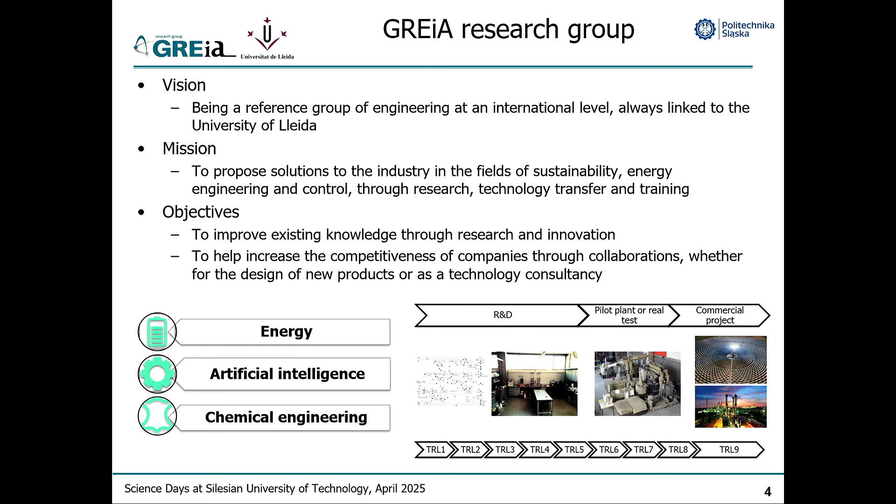I like very much this image at the bottom because, as most of you here are engineers like us, you will understand this. I really like having new ideas and going to the lab and testing them and seeing if my crazy ideas work. So we like to work here in the lab, but being engineers, we also love to go to the industry and to really know that what we are doing gets into the industry and into the market. The photos here are not by chance.

We actually worked many years in concentrating solar technology in Spain when it was developed around 15 years ago. And today we can say that all the thermal energy storage tanks that are built worldwide have a little bit of our input, of our science in them.

So what do we do today at GREIA Research Group? GREIA stands for Energy and Artificial Intelligence. In Spanish, AI is Inteligencia Artificial, so we say it the other way around. But actually, that's the idea.

It's a joint of two research groups previously, one working on energy, where thermal energy storage is our flagship. But today, 60% of our academics are from artificial intelligence. And I always say that they do their weird things, they do their theories, but half of them work very closely with us to use artificial intelligence in what we do every day, from control strategies to design of storage tanks to selection of materials.

And they keep telling me all the time, Luisa, we have to meet, we can do much more for you. And we also work in chemical engineering. When you work in thermal storage, you will see later, if you don't do materials, it's a little bit difficult to be there.

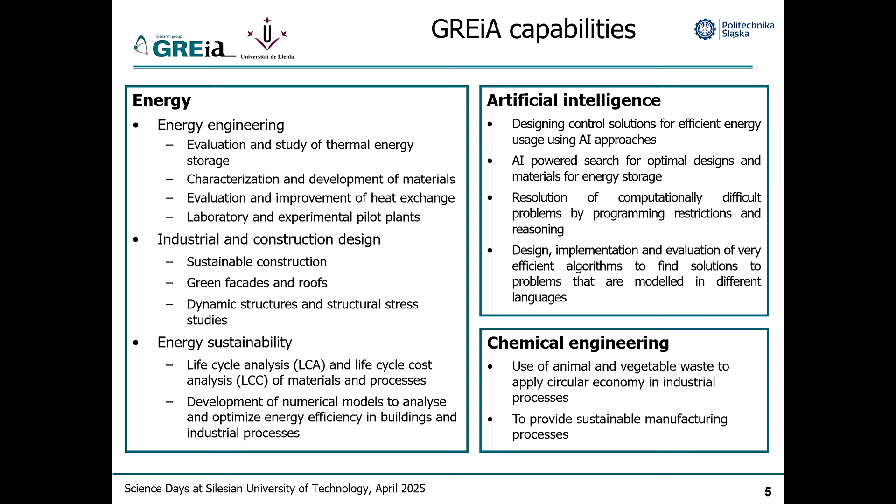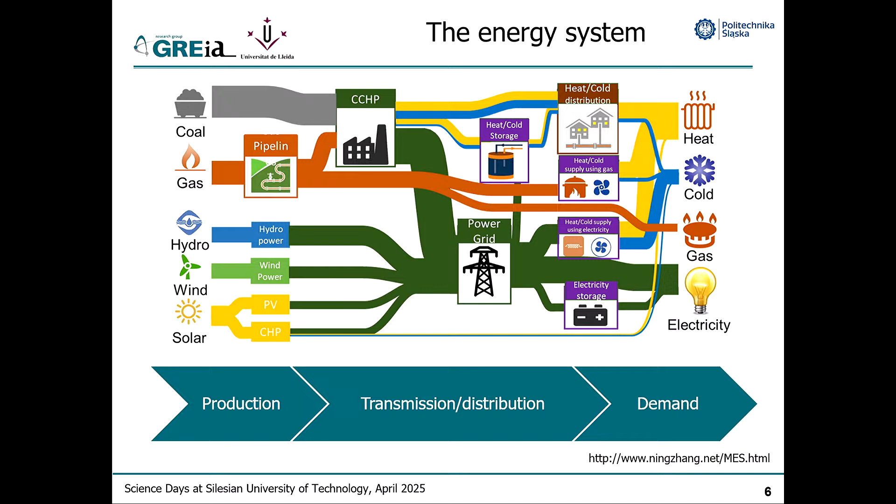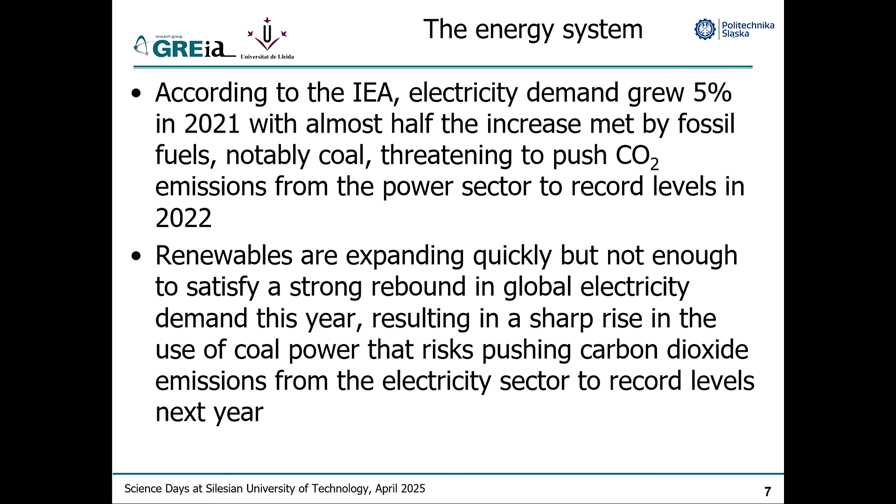And actually, thermal energy storage has or can have an impact mostly on the production and the demand side. But when you do this, the way you use this technology is very different. We don't have to go too deep into this. We all know energy today is really one of our main concerns. Energy demand is growing, even though we are making big efforts to decrease our per capita energy use. More and more people, more and more buildings, more and more industry, and therefore this is a big concern.

Also in Europe, we are short in energy and we have to import a lot of it, some parts of Europe more than others, but I think all of us have a little bit of renewable energy potential. One of the goals of the EU is to decarbonize our energy system, and that's where we have a role and can make an impact. As you know, renewable energy is not constant. We have it when we have it, and we have to use it when we need it. And this is why energy storage is so important.

For us, thermal energy storage is also very important, but I always say that it's the forgotten or unknown energy storage technology. When we talk about energy storage, everybody immediately thinks about batteries. Today, other technologies like supercapacitors and flywheels are there, but most people don't know or don't remember that thermal energy storage can also have a key role in this change.

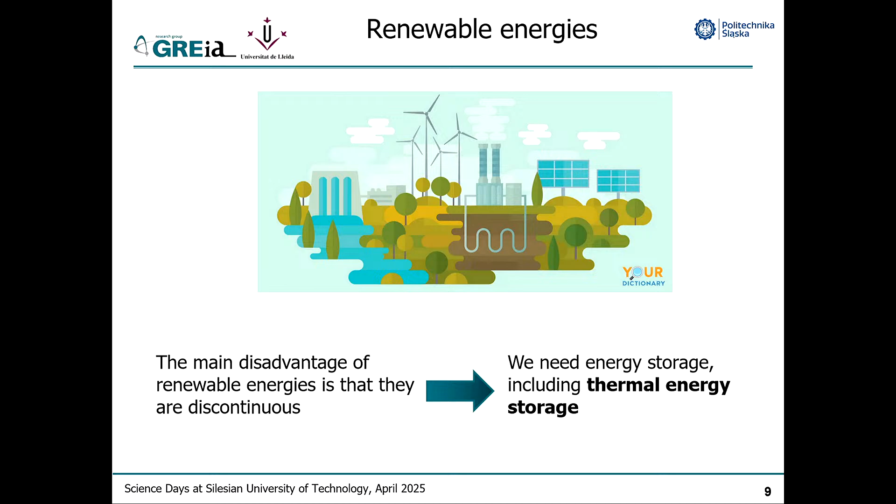We can use it just for storing the energy and using it at a later stage. That is what it's usually known for, to change, let's say, the time of use of the energy. But we need to remember that we can also change the power, we can also change the place, so we can transport energy, and we can also change the temperature, a lot of times linked with a heat pump, but sometimes you don't even need the heat pump. So really thermal energy storage is a technology with a lot of potential that can help us, as I said, both on the supply side and on the demand side.

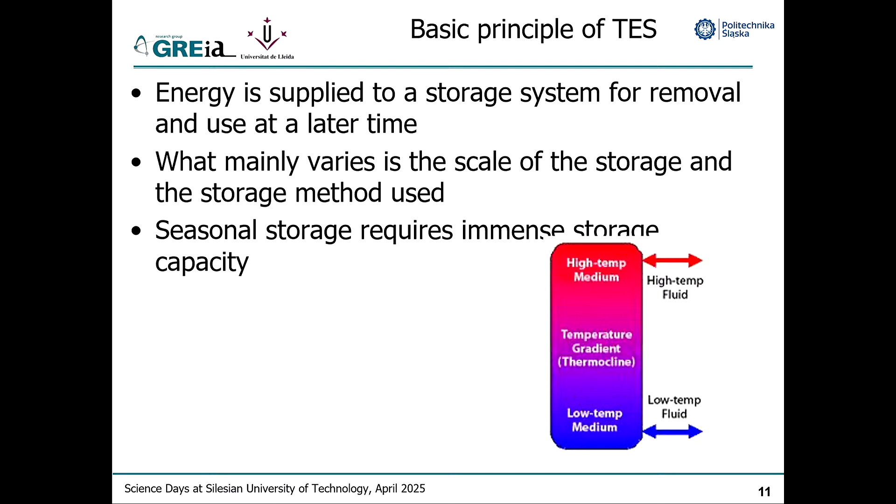This is also kind of obvious, but a lot of people forget about it. We need a thermal energy storage tank. We need a place to store this energy, and this is one of the issues we are always working with. The size of this tank will depend not only on the technology, but also on how or why you need this technology. If you need it for the short term, it will be smaller. If you use a technology like thermochemical, as we will see, it will be smaller. But if you go to seasonal storage, which is something we are very interested in, it will be bigger.

Also, from an engineering point of view, it is very important to understand that for these systems, you need to charge and to discharge this storage tank. We need to remember that storing the energy, the material, will give you the energy density, but the way you charge and discharge will give you the power. So how fast can you charge or discharge this tank?

And I always hear people telling me, you need to have a lot of power because you need to charge and discharge. That's not always true. For example, in the built environment, as we will see later, if we use the storage in the walls to keep the room at a nicer thermal comfort, then you don't want to discharge fast. On the contrary, you want to discharge very slow.

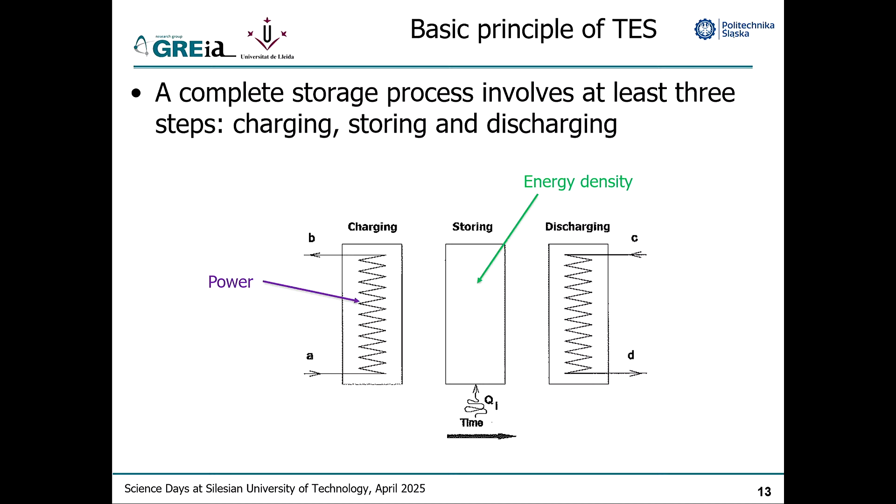Okay, so this is something that we always need to keep in mind, that there are these two aspects, and also that, as you see, this is very multidisciplinary. When we work on energy density, we work at material level. When we work on the power, it doesn't matter if it's fast or slow, it's more a mechanical engineering level, but if you put it in the built environment, then you talk with civil engineers or with architects. So at the end, as I said, many different disciplines are involved in this technology.

Even today, in countries like Poland, this is becoming very important because we are realizing that cooling is starting to be one of the future keystones of our world. Until now, people were very focused on heating, but today we also all use cooling very much. But the problem with cooling is that it's very energy demanding, and also usually we use it at a given time of the day. For example, in summer, you would need air conditioning mostly at lunchtime.

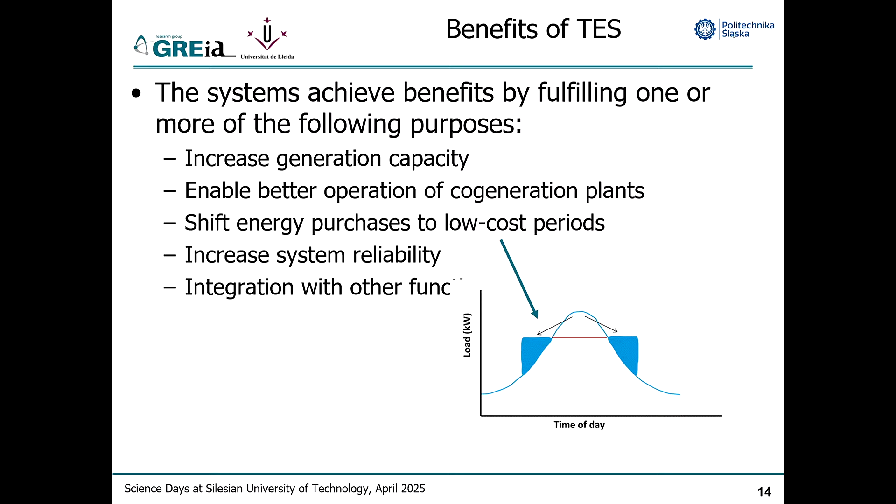If all of us switch on our air conditioning systems, then we have these peaks in the energy demand that sometimes our energy grid cannot withstand. So that's why we are using, for example, thermal energy storage, where you can produce this cooling at off-peak times, and then you use it during the day. How do we do this? The easy technology is just you produce ice during the night when you have excess electricity, and then during the day, you only have to melt this ice to have the cooling.

I think that for us, this is known, but to me, what is very strange is that there is a lot of industry using this technology. For example, the dairy industry, but if you ask them, do you use thermal energy storage? They will tell you no. Do you store energy? No. But they are doing it because they are producing ice at night and then using this cooling during the day. That's why I started saying that this is an unknown technology or forgotten technology.

So which technologies do we have here? I think that the slide is heavy and it doesn't come.

Yeah. So there are three main technologies in thermal energy storage. The first one is the most known one, which is sensible energy. This is when we heat a material to store energy in it. Okay, so the technology here, remember, is just heating up, for example, heating up water to use it at a later stage. The second one, which has been attracting a lot of interest in the last 20 years, is latent thermal storage, when we use the phase change of a material to store energy. The example I gave before, ice, this is latent thermal energy storage. Okay?

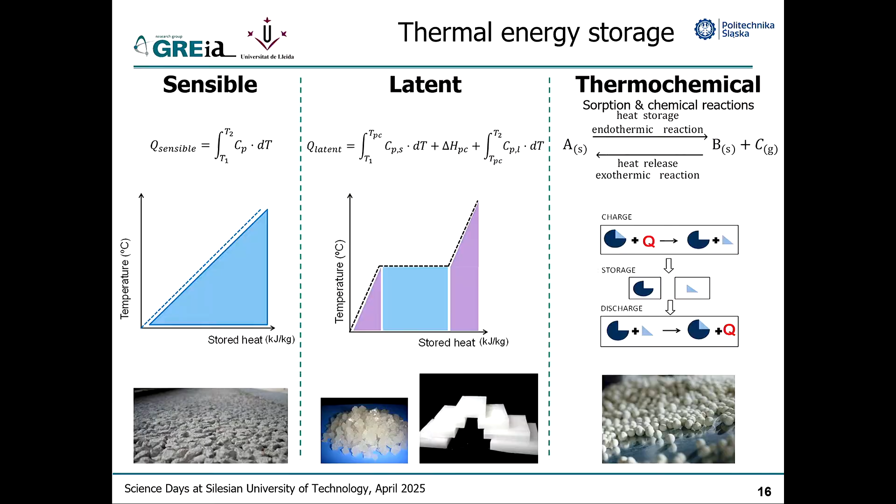Why do we use this technology? Because we all know that to melt something, you need much more energy than just to heat it up, so you have more energy density. Okay? So with a smaller amount of material, you will have more energy density. These materials that are used like this are called phase change materials, PCM, so some of you might have heard of them. So then you will ask me, okay, if we have ice, that's it, we already have it.

The only problem is that here you get the energy at the temperature of the melting or the solidification of the material. With ice, this constant temperature is 0 degrees C, and you cannot change it. So to change it, you need to change the material, okay? And you need to have other ones. For the built environment, we work at 20 degrees C, 30 degrees C for thermal comfort. We work at 60 degrees C for hot water.

For industry, we are going much higher, and actually, as I was discussing this morning, I have a project with one of your colleagues sitting here with us where we are trying to use metal alloys as phase change materials for the industry, and we're working at around 300 degrees C.

And the last technology is thermochemical, and here it's where we use either sorption or chemical reactions to store energy. So really here we are either by physical means, with sorption, or with chemical means, with chemistry, breaking up a molecule to store the energy, and then when we put these two molecules together, we retrieve this energy and we can use it for our application.

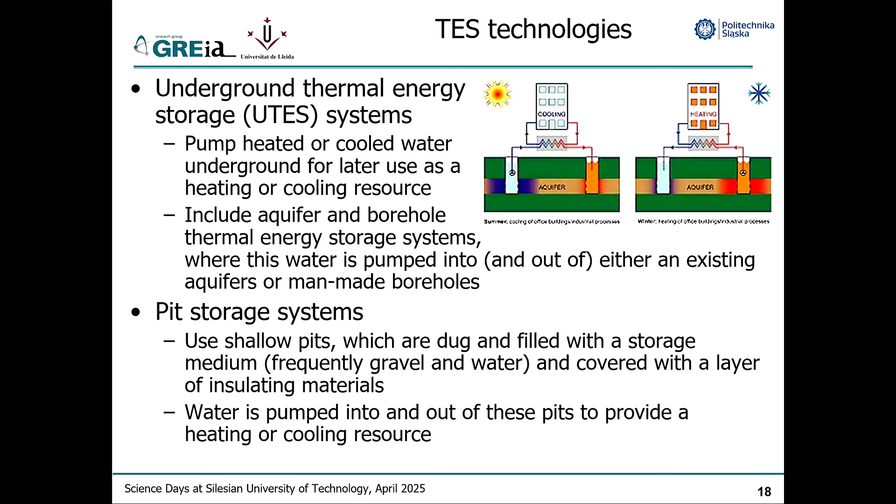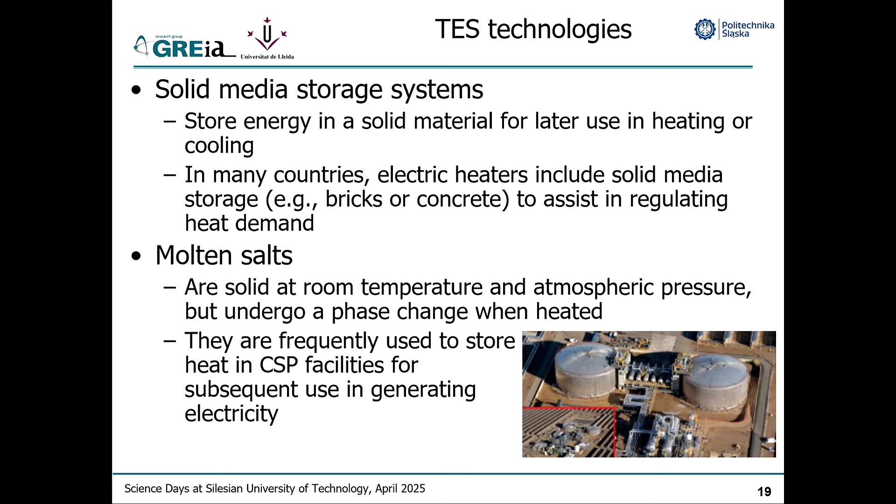To me, it's very interesting to know that this started to be developed in the USA in the 80s. And then it was finally developed together with them, but mostly driven by European funding in the 2000s, and today it's a commercial technology.

Water tanks, of course, are coming back today because of the change of the energy systems at home. In Spain, we use them today to store solar energy in thermal systems. In the UK, for example, they use them because they mostly use electricity to heat their water tanks, and also because of the peak demand, they use water tanks to get showers.

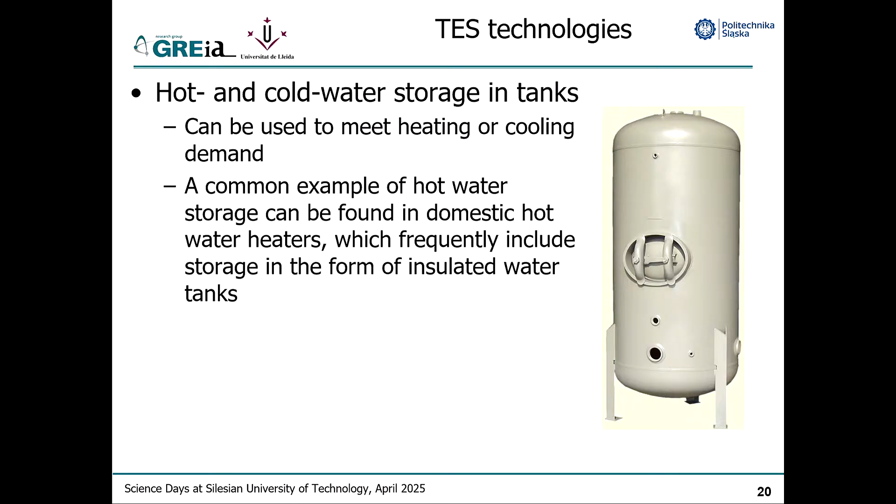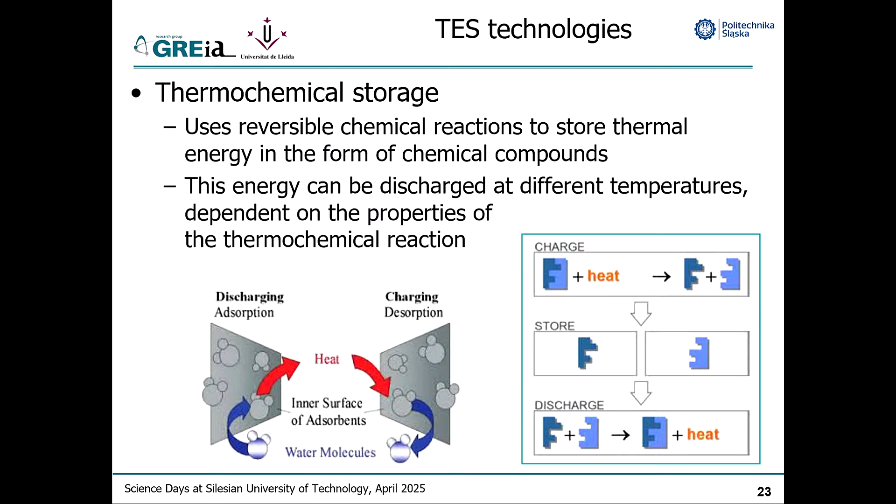For latent, as we discussed before, it's not only about energy density, it's also that you recover the energy at a given constant temperature. Ice storage, we already discussed this a bit. And then with thermochemical, again, remember that these are two different technologies. I always say I don't like the name thermochemical. I prefer to talk about sorption and chemical reactions.

And then applications. I already mentioned most of them, and that's why I will go fast through this. Today, the main applications of thermal storage are the building ones, where you can put energy storage in different ways in your building envelope and just let it go with the climate. This is when you talk about passive systems. You can then intervene with, for example, fans to discharge these storage systems, and then it becomes active.

Or you can even join them with your already active systems, for example, with domestic hot water, but today one of the hot topics of research is with heat pumps, of course. At high temperature, solar cooling was a very hot topic around 20 years ago. Today, it's not so attractive because to do solar cooling with thermal storage, you compete with photovoltaics. Photovoltaics with heat pumps is cheaper.

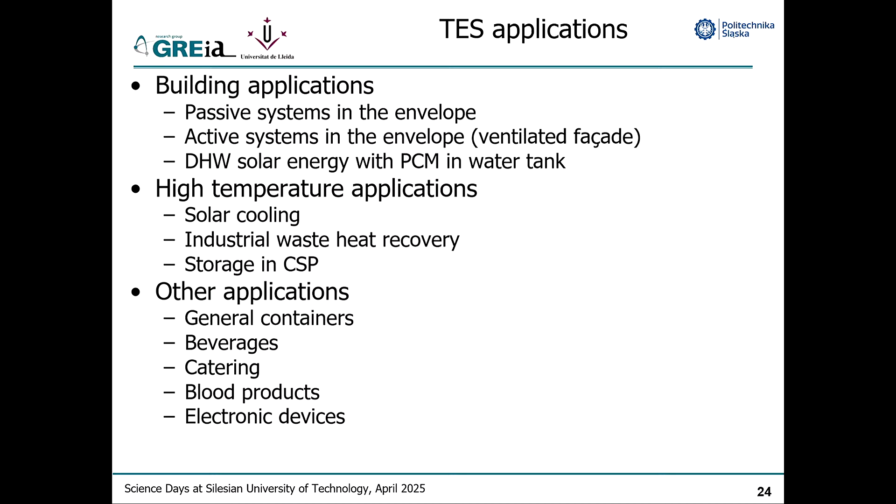Today, a very hot topic, because the industry is asking for it, is industrial heat, and especially recovering industrial waste heat. And then also we already discussed CSP. And then, you know, thermal storage is actually used in many other applications we don't even know about. As you will see later, I have a slide on this. So let me go fast with this. I should have cut this out.

PCMs have always been a big topic in research. I think people like them a lot. And because it's still not fully in the market, we could discuss why this is happening. There is a lot of research on this. Of course, today, hydrogen storage is booming, and when you discuss thermal storage, you also find linkage with hydrogen storage.

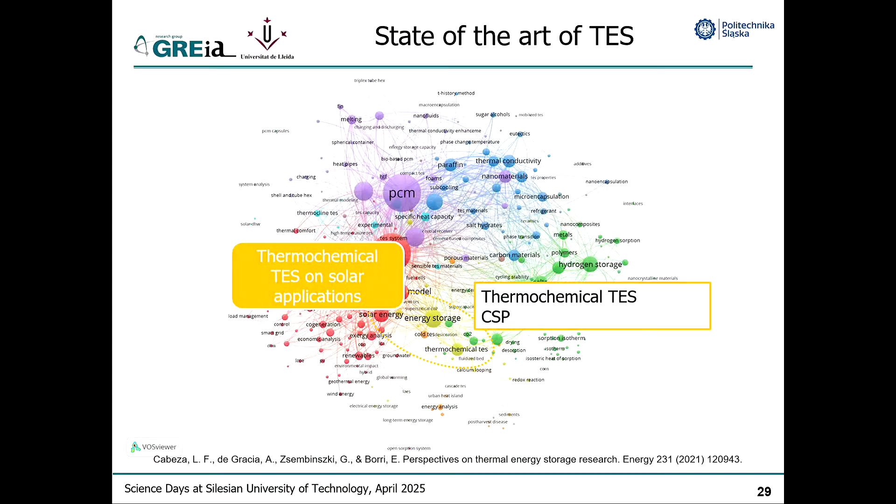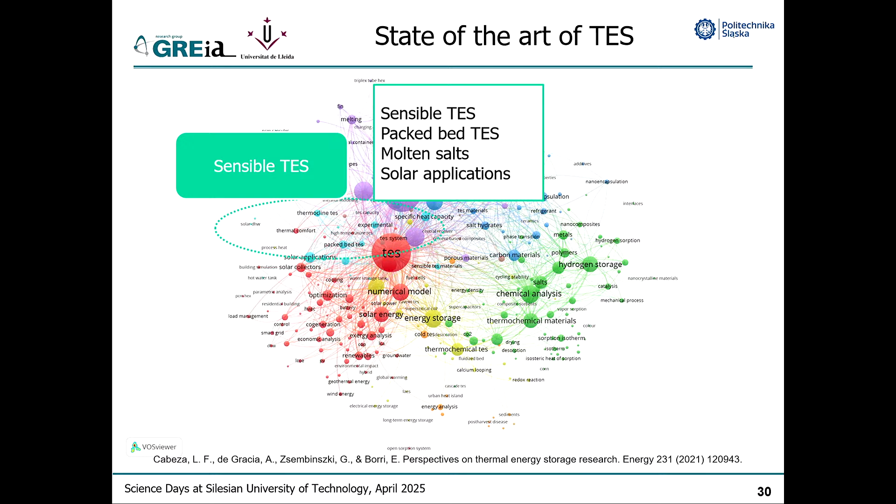On the application side, we already saw some of this coming up here. In sensible thermal energy storage, again, when you talk about industry and high temperature, one of the techniques is the packed bed, and this is also a very hot topic today. And here with these colors, with this technique called bibliometrics, we can see what is older and what is newer in the research. In yellow are the ones that are newer, and in blue are the topics that are older, okay? And this is what we use to find these research gaps.

And we were trying to see, okay, which words come here in yellow, and also which ones we don't find at all in the literature. And here, for example, we already see smart grid. I know there is a session on smart grids in the conference. And as you can imagine, thermal energy storage also has a big role in smart grids. Actually, energy communities are starting to be something very hot in Europe, and energy storage is one of the ways to help in sharing energy, for example.

And the top part is more about heat transfer. I said that in thermal energy storage, you need to charge and discharge your system, your tank, and then everything related to heat transfer is also very important. But we also see bio-based PCMs. And here is where we start seeing something related to sustainability, that it's not only linked to renewable energies. So when we talk about bio-based PCMs, if I need a material where to store my energy, one of the things I want is that this material is also sustainable. And this is why bio-based PCMs are one of the topics being studied today.

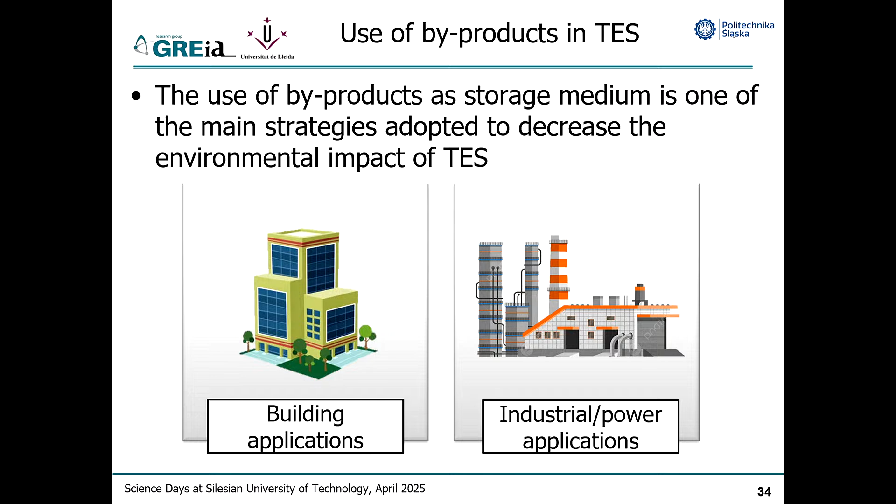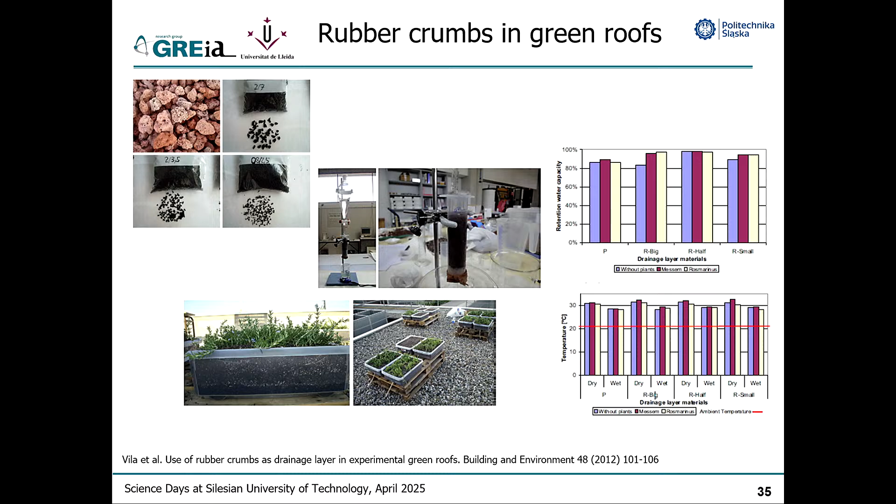We started to work very much at the material level, finding sustainable materials to substitute what was already used. For example, we already published in 2012, so probably we started in 2010, trying to use waste in our systems. Here we were using rubber crumbs. You may know this is waste from the tires of our cars. And we were using them in buildings, in this case in green roofs, substituting the drainage layer. We tried them, as you can see, in the lab and also in small trays, but also,

I'm running out of voice, sorry, I have a little bit of a cold. Yesterday it was 25 in Spain. Here it's, so my body is not adjusting very well, but anyway.

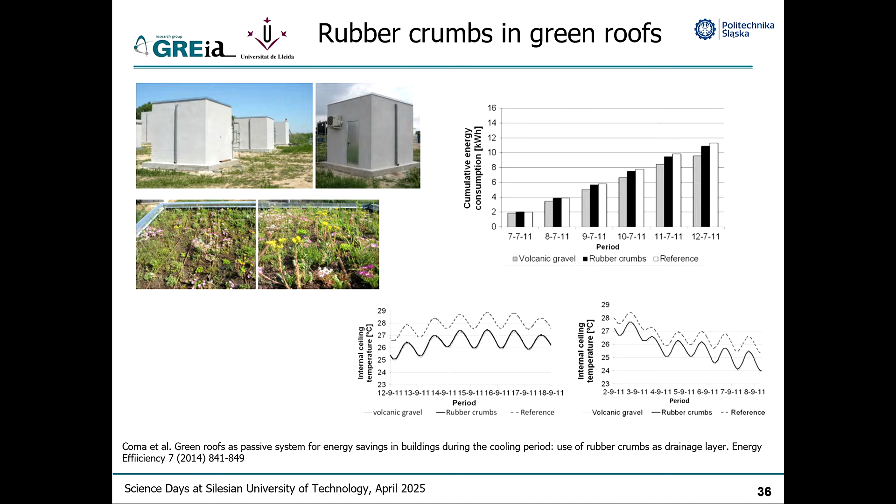So I was saying that we try this technology not only in the lab, but also in kind of real buildings. These are buildings that we have, well, not in the labs, but in the university area, where we have buildings like this that are 3 meters by 3 meters by 3 meters, so kind of small house-like cubicles, where we test all these technologies. And here we implemented real green roofs to try these new materials.

In another, this was actually a PhD that we developed also back then, where we were trying to develop a new material for acoustic properties. This material is a layer that you put in the walls to really avoid noise going from one side to the other. Probably this room has it, because usually when you have rooms like this where there are speakers, you need this. And to achieve this acoustic barrier, they use high-density materials.

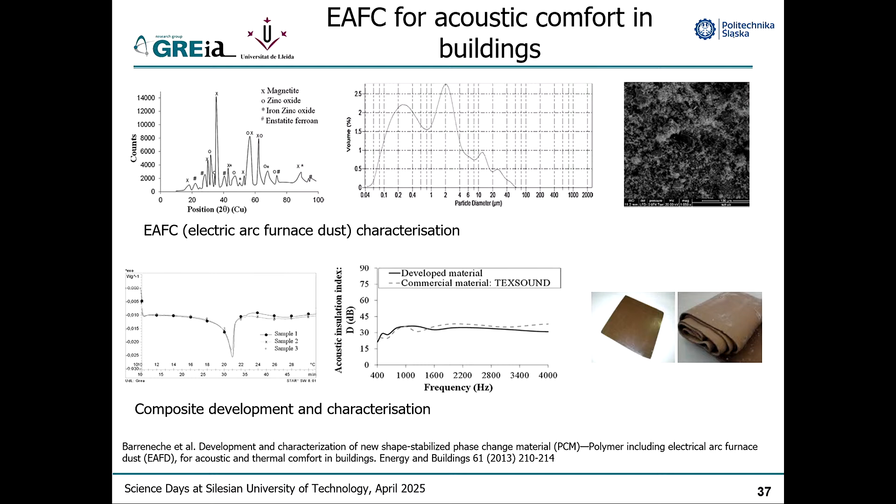So working with the University of Barcelona, they were telling me, why don't we use, instead of any material, waste from the metal industry? But when we were discussing with them, they asked me, but Luisa, can we also get some thermal properties in this new building material? And then we started to work with them also to include PCMs in it, to give this thermal inertia to the material.

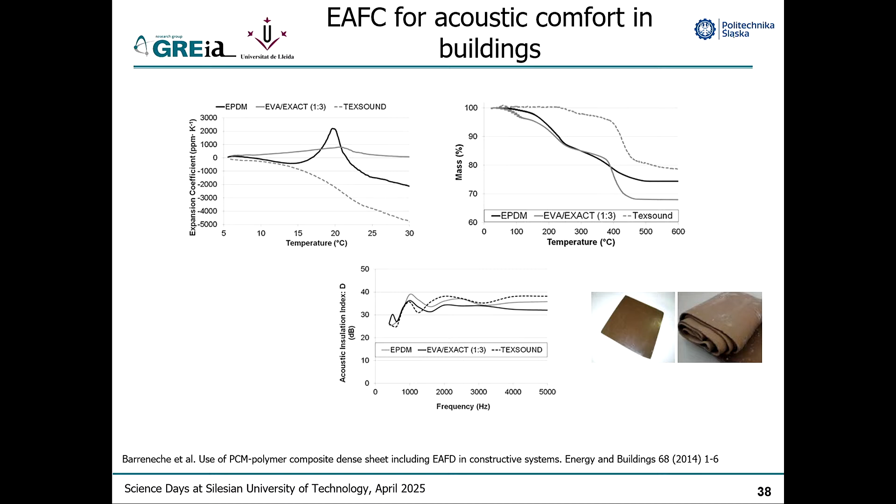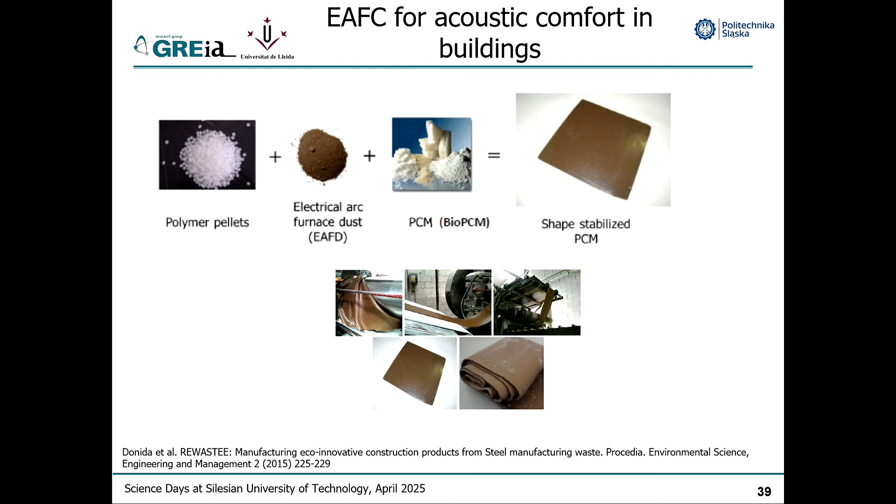Again, we developed the material, we did all the acoustic stuff, we did all the thermal characterization, but then we actually worked with a company near Barcelona that was producing this, so they were really scaling up our material and seeing if they could produce it. And we also tested it in buildings. This time it was in an inner wall, and we really tested, again, the acoustic and the thermal properties of the materials.

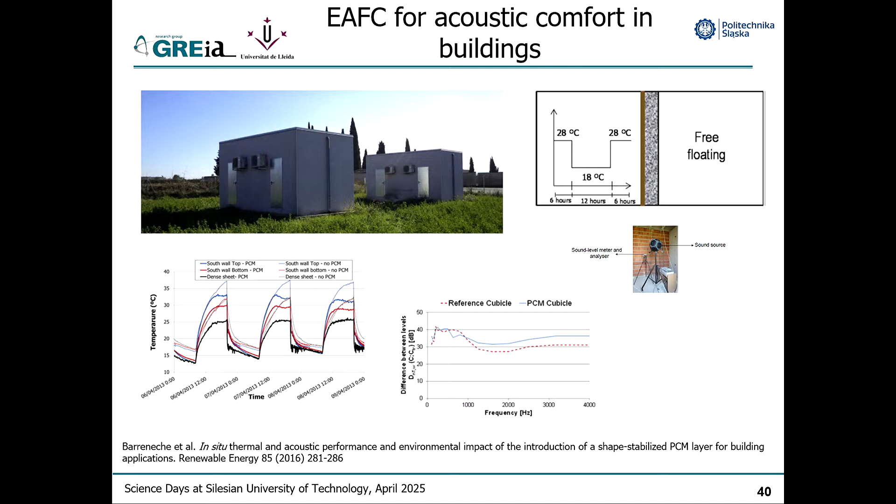It just sometimes takes long because of the photos.

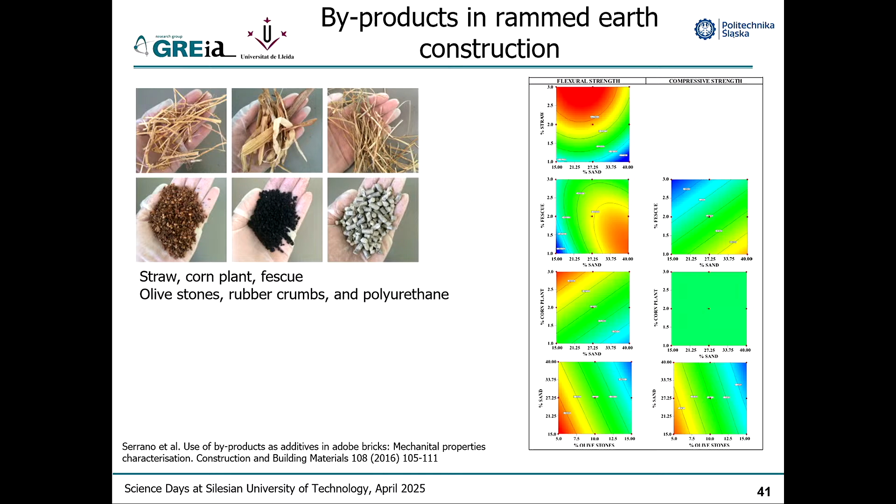Similarly, we were trying to put waste materials in rammed earth. Rammed earth is a construction system that was used in the past, but in Lleida there are still a lot of rammed earth buildings, and when we talk about refurbishing, some people are just demolishing them and building new, but if you want to refurbish them, you need to work with this. And we wanted to substitute the typical straw, or even cement, which people use today in rammed earth to give it more structural properties.

But if you put cement in the rammed earth, your sustainability is gone. You cannot reuse it again. So that's why we added different materials. You even see waste from olive production, which in Spain is big, rubber crumbs again, polyurethane. This polyurethane comes from dismantling refrigerators from homes. And then we try to see the behavior of this, again in the lab, and if it works.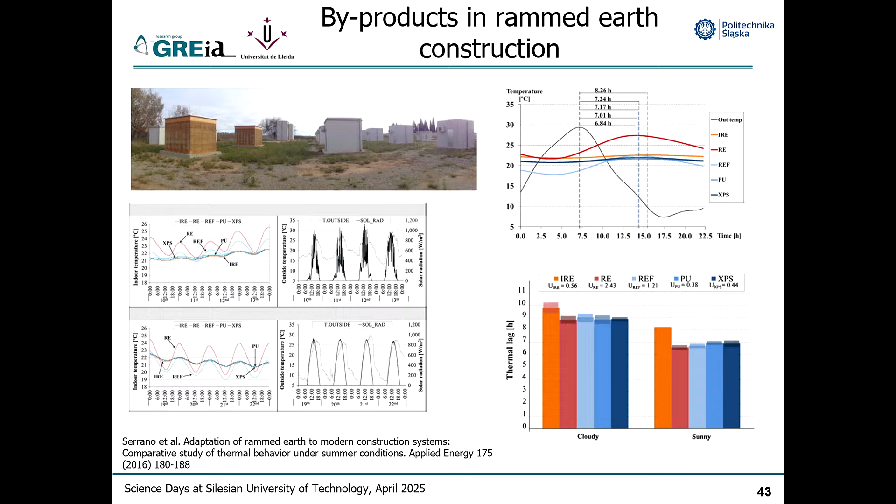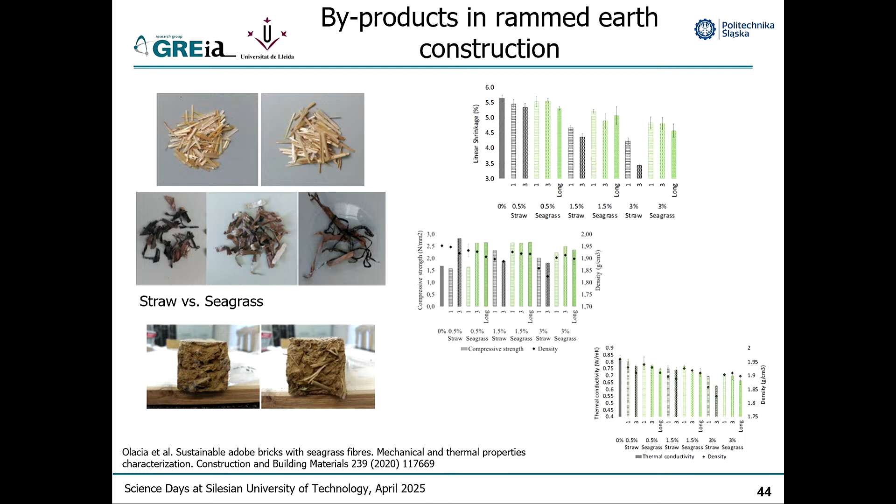So in the lab, but also in kind of real buildings, and compare them to other buildings built with bricks and see the behavior of this material. We have done this also with algae. Seagrass, actually this comes from Sicily, in Italy. This is the algae that they take out from the beaches in summer so that we can go there and swim, and they don't know what to do with it. So we were also trying to add this in building materials.

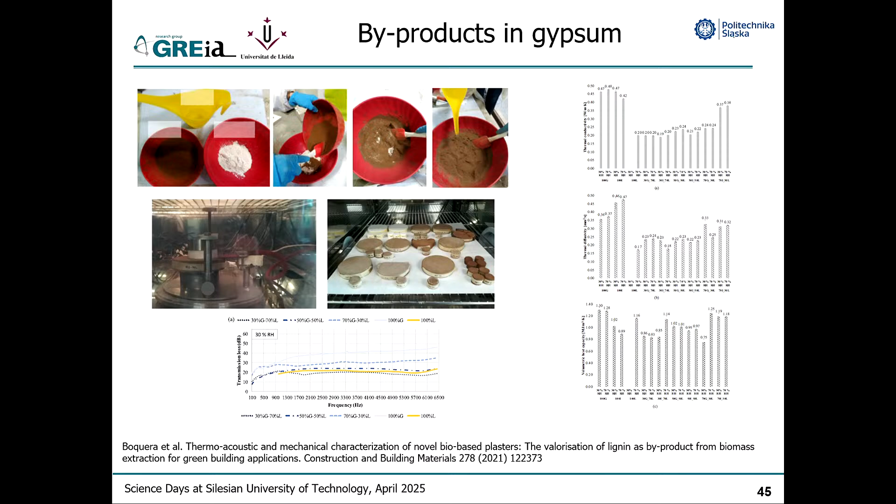We were trying to put lignin coming from biomass production in gypsum. All of this, I go fast, everything is published. There are just many examples of using byproducts, here in mortar to decrease the thermal conductivity.

Here, actually, for me it's very interesting because this is a collaboration we have with Tunisia. They have a lot of textile industry. All the industry that we moved out of Europe is now in Northern Africa or in China, and they now have the problems we had in the 80s. What do we do with all our waste? So this is a lady who is coming to my lab, and we are adding textile waste, cotton but also other textiles, in mortar, and we also include phase change material to give both insulation and thermal inertia. And we're having quite good results.

Actually, I presented this where I met Angelina, in SynerCrete. I presented this work there.

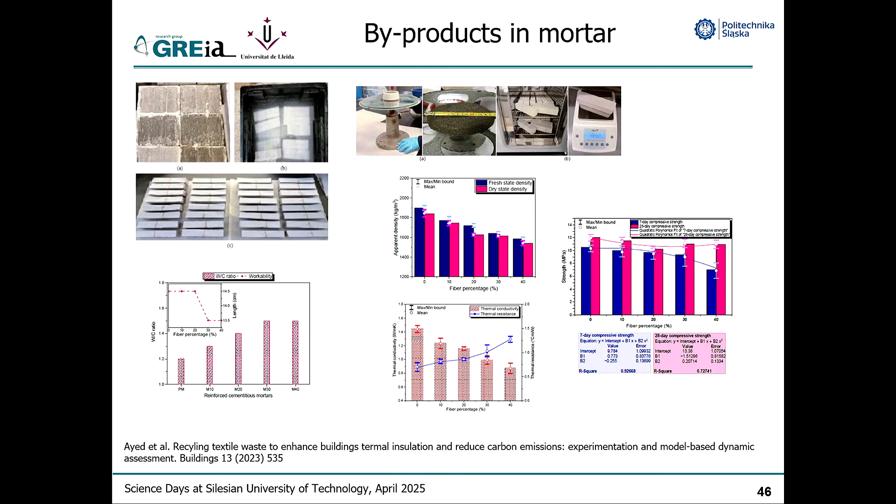Another topic we are working on is high temperature concrete. Here, we want to use concrete for storage at temperatures higher than 300 degrees C. You may know that normal concrete withstands up to 400 degrees. That's why when there is a fire in a building, the building collapses, because the concrete just cannot withstand the temperature. So in my lab, we have developed a concrete that can withstand 700 degrees C. We have done this by changing the cement. We don't use Portland cement, but calcium aluminate cement with different aggregates.

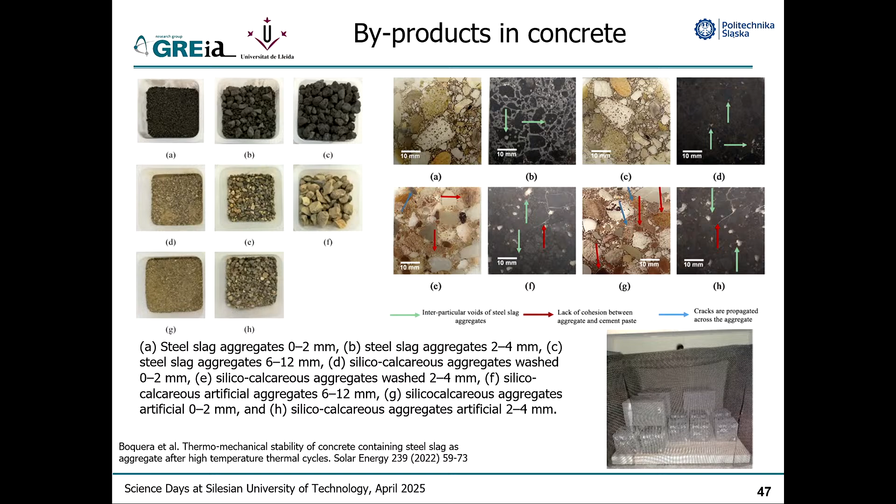Now, this concrete can withstand 700 degrees, so it can be used for CSP, but also for industrial applications. But all the aggregates we use here, we try to use only waste from different industries. So again, looking at the sustainability and trying to do the circular economy in our developments. So that's why we came to circularity. We need to start thinking that everything we develop has this circularity issue.

Again, I don't want to go into too much detail here, but to me, when I sit with my PhD students and they give me an idea, I tell them, okay, but when you develop this new material or this new system or this new building concept, are you thinking on, first of all, not only using today's waste, for me this is not enough, but also what is going to happen to this at the end of its life? Okay, so if I have material, can I reuse it later? That's what I was saying before.

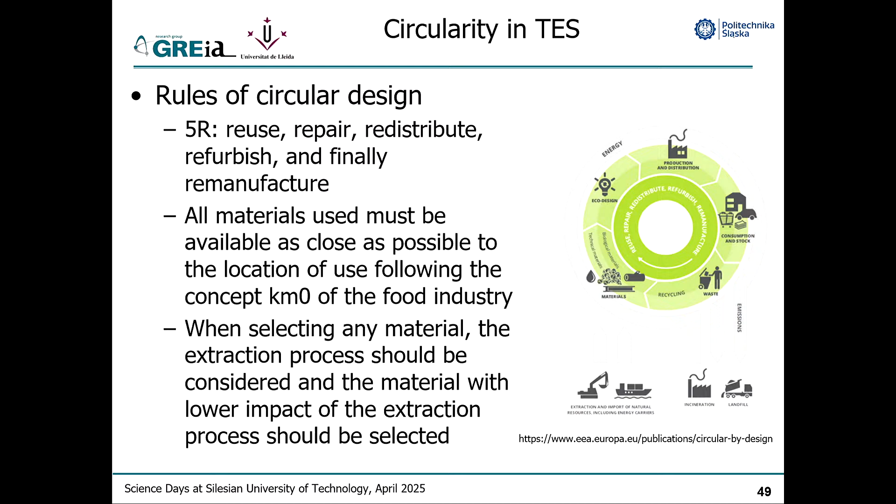If I put cement in rammed earth, I cannot reuse it later. If I have a new storage tank, can I dismantle it at the end and reuse it again? And this is the concept of circularity. And I think we should all look at this, even if we work only at material level or developing a new model for a new energy system. You always have to have in your mind, am I going to be able to reuse it later?

Am I using raw materials that are either bio-based or that are, if possible, byproducts from another industry? Of course, if you use energy, you want to use renewable energy. And this is the concept that I wanted to bring in the talk, that anything that we do at technology level, you need to keep this in mind. How are we going to implement this and reuse it later?

I always explain that the first time that I was interested in this was when I was testing phase change materials in these cubicles you saw before in these houses. We were adding phase change material in the wall to decrease the energy demand of the building. But at some point, I remember asking my PhD student, okay, so we are saving 15% energy doing this, but you are adding a material to the wall of the building. So you are giving another type of impact to this building. Is the saving of energy compensating this inclusion of a new material to your building?

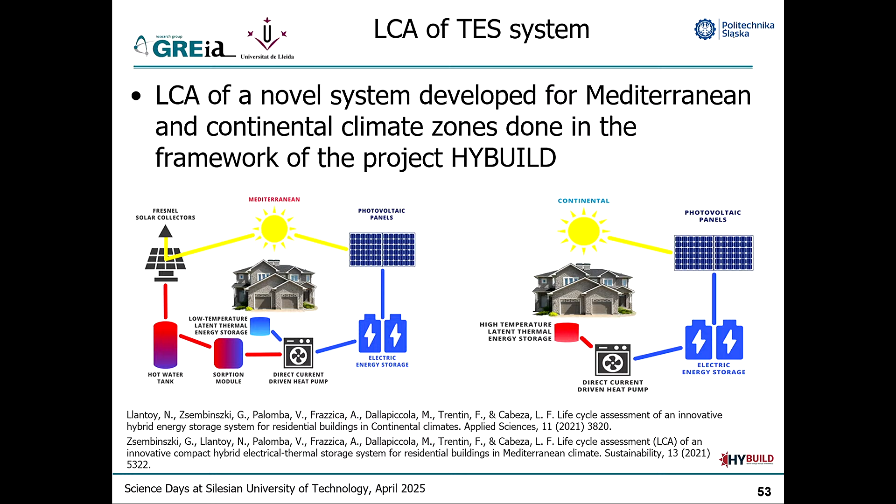As I said, you need to see which materials you're using. This is what is called the manufacturing stage. You need to see what you are going to do at the end of the life. How are you going to dismantle it? Are you going to reuse it? Or are you just going to dump it? And then also in the operational stage, of course, you look at how much energy you are saving compared to a standard system. And that's the other idea. To me, it doesn't make sense to do an LCA of a system by itself.

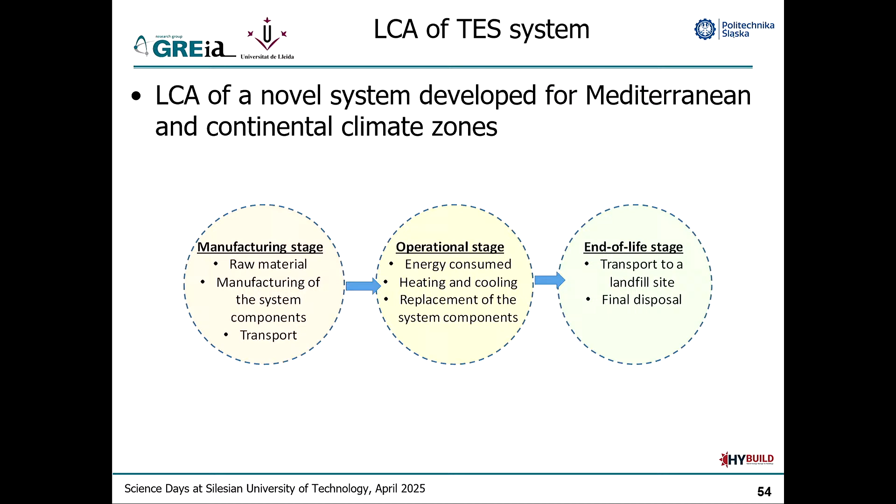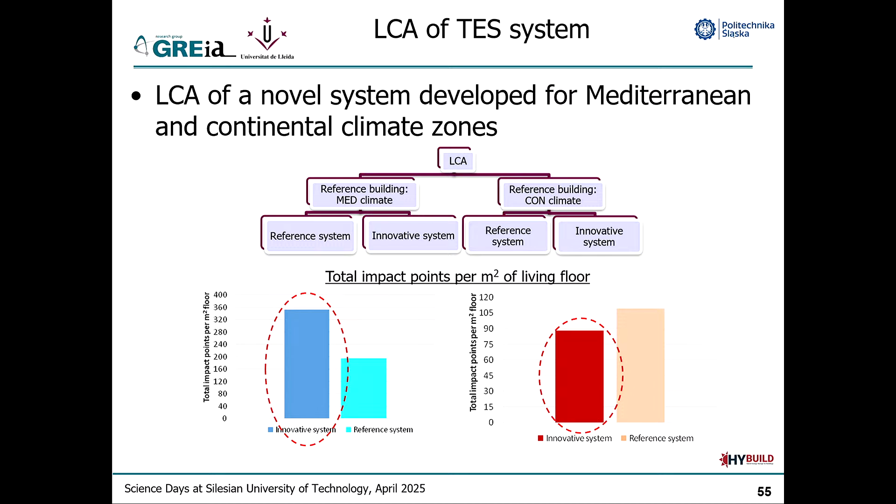I also give this example because at the end, doing the same exercise with two different metrics, you have different results, and you need to evaluate why this is happening, because to me, it doesn't make sense to do an LCA if you don't then evaluate where you have the problem, where you are decreasing the sustainability, so that you can give solutions. And by doing it, even with two different metrics, it can help you to identify the points that you have to improve in your system.

Okay, and then finally, I have, I think, 5 minutes left. It's the social part. As I told you, the last example I gave you is one clear example. If we talk only about buildings now, most people prefer to have a heat pump or a chiller and a small boiler, because they know how it works. Everything works from the technology side, but for them, this is easy, they know it.

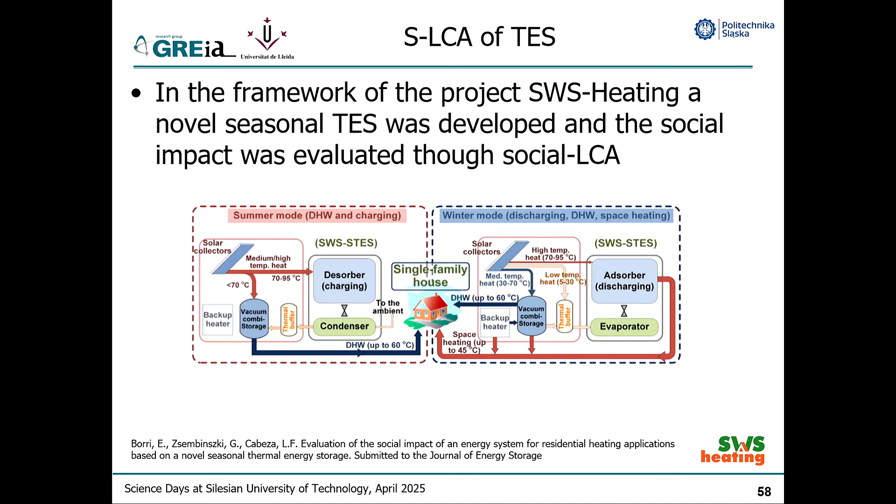So imagine that I have to buy PV panels, and I have two different companies selling me the PV panels. They are even very similar from a technical point of view and in cost. How do you choose which one? To me, one of the issues would be the social area, okay? And to do this, it's challenging.

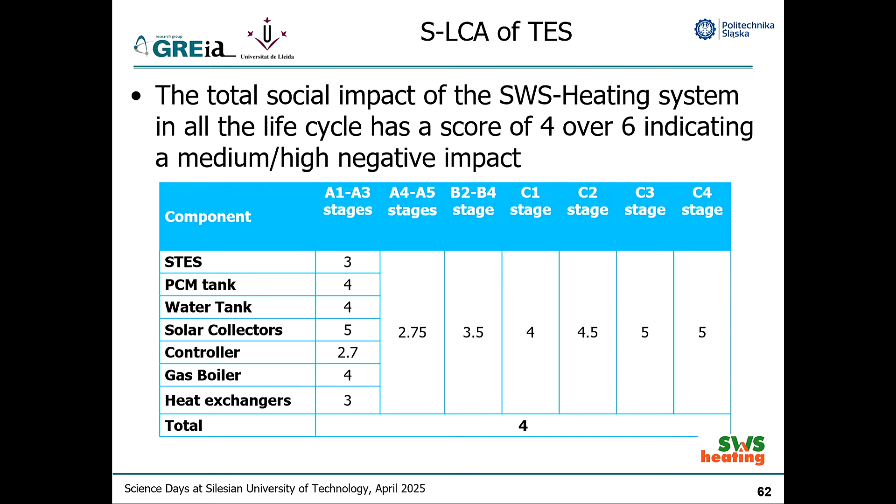We then evaluate them. We translate everything to numbers. We're engineers, we love to do this. And then we try to decide in the value chain of your system which is the weak point of the social aspects of this technology. But to me, this is nice, but what is more interesting is what I said before, working with the companies and seeing that they start to be interested in these topics because you just give them awareness of them.

And this is the evaluation that we did in that system that I showed you before, in the different stages of production, to use, to final disposal. For me, it's interesting to see that most companies are not taking care of the final disposal of the things that they're producing, which for me was strange because I always thought that today recycling for industry is already something done and given, and it's not.

And yeah, again, we have the demo in Spain of all of this that I showed. These are the different components where we studied the social aspects and worked with the companies. And for example, of course, the installers were from Lleida, so we were also asking them this questionnaire and trying to understand how they react to this.

I think this is the end of my presentation. Everything that I showed is published, so you can use it. Sometimes I use this for students, so just remember to reference everything.